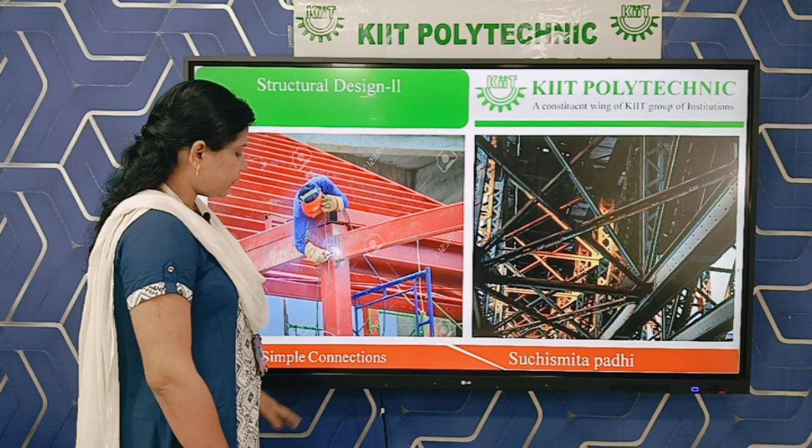Today we will read about simple connections from structural design 2. We are studying about different types of steel structure, or the design of steel structure, in structural design 2. Examples of steel structures include roofs of railway stations, auditoriums, toll gates, etc.

A simple example which we use in day-to-day life is the grill of a window. That is one example of steel structure. We make steel structures by connecting more than one member of different shapes and sizes. Generally, we use rolled sections for making steel structures, like I section, T section, channel section, and angle section. There are many other sections used for steel structures.

So these are some images of steel structures. Here, see in this image, the man is holding it, and this is another image.

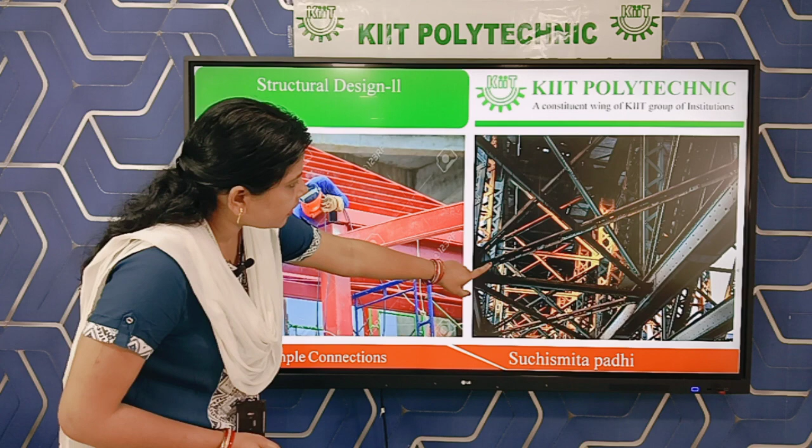So let's start simple connections. What are the types of simple connection, and what are the methods by which we connect the members in case of steel structure? Let us start with the first slide.

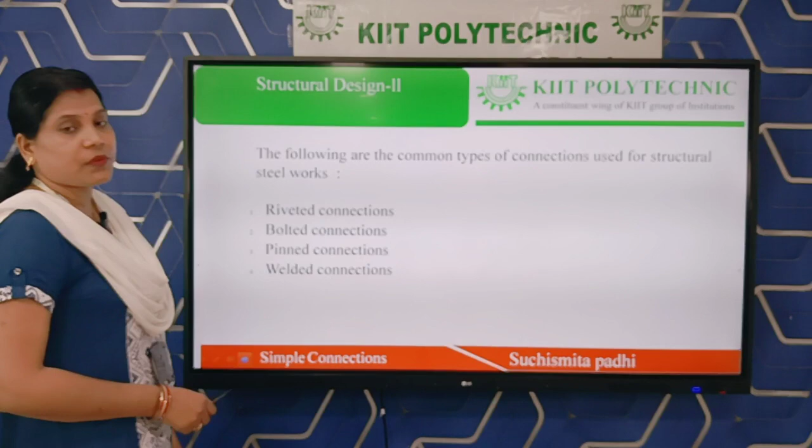The following are the common types of connections used for steel works. There are four types of connections: one is riveted connection, another is bolted connection, third is pinned connection, and fourth is welded connection.

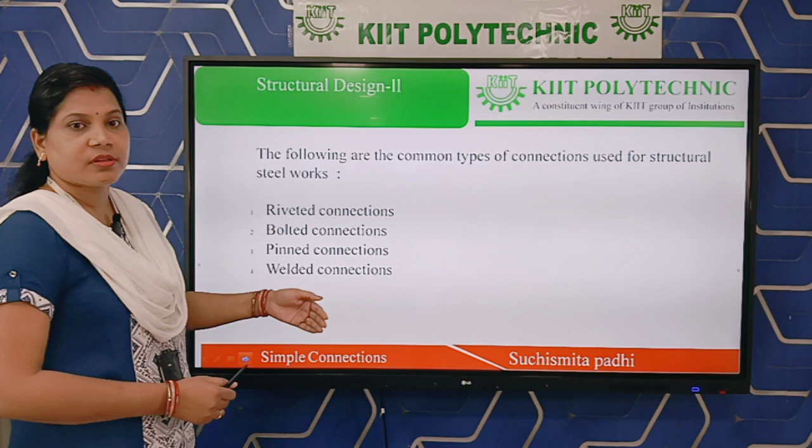Today we will cover riveted connection: what is a rivet, what is riveting, and what are the types of rivets we use, according to the shape of the head and according to the place used. So let's start riveted connection.

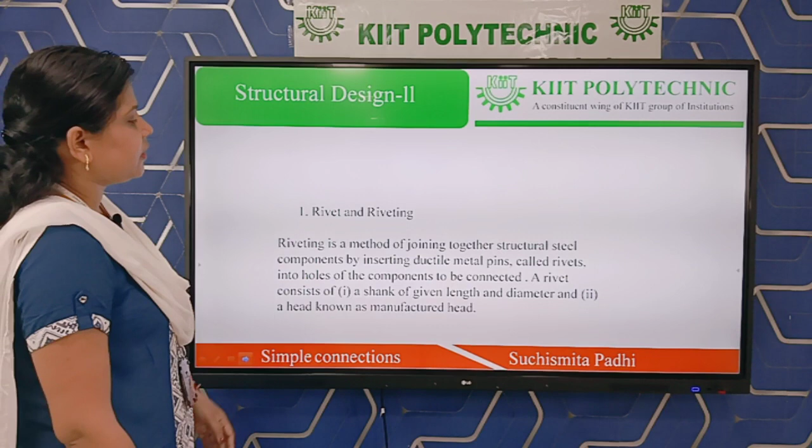Riveting is a method of joining together structural steel components by inserting ductile metal pins called rivets into the holes of the components to be connected.

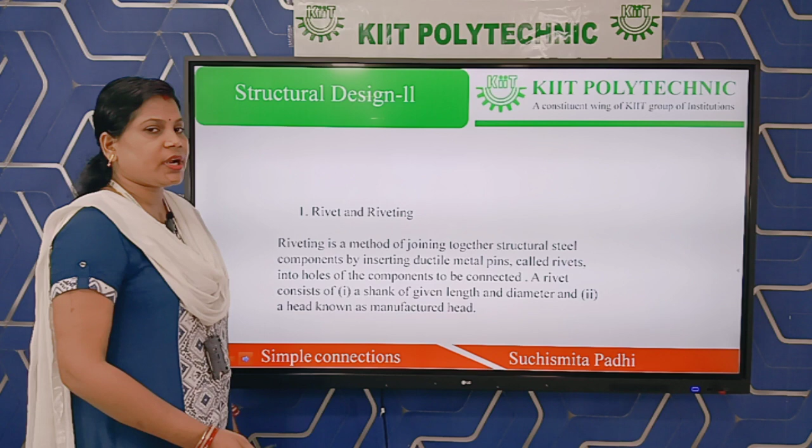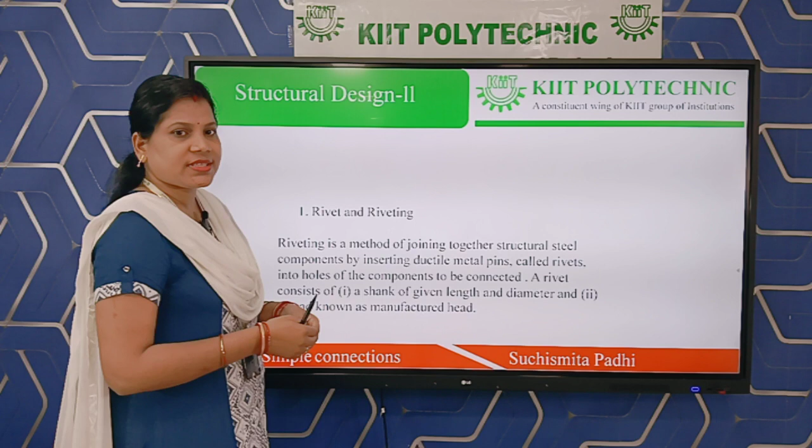In a rivet there are two parts, one is shank, another is head. The body part is known as shank, and the uppermost part is known as head. So a rivet has a shank of given length and diameter, and a head known as manufactured head.

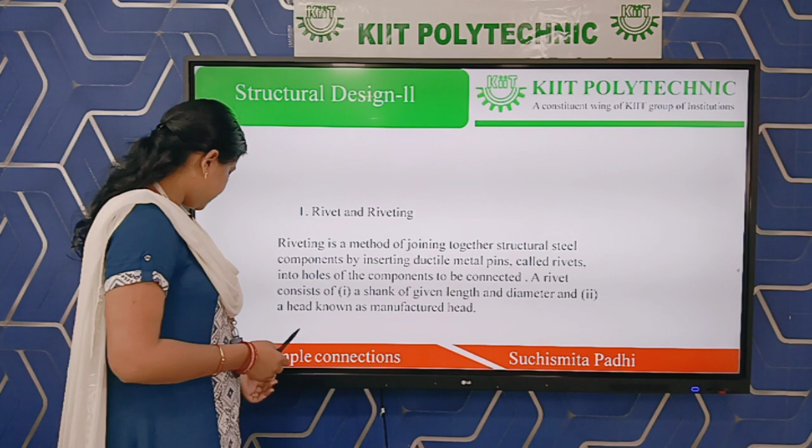So in riveted connection, according to the place used, there are three types of rivets: one is hot driven field rivet, another is hot driven shop rivet, and another is cold driven rivet - that is, hot driven field rivet, hot driven shop rivet, and cold driven rivet. So hot driven and cold driven - what is the difference?

Hot driven means before insertion of the rivet, we are heating the rivet - that is known as hot driven rivet. If you are inserting the rivet at room temperature, that is known as cold driven rivet. That is the only difference between hot driven rivet and cold driven rivet. Next is field rivet and shop rivet. Field rivet means we are using the rivet in the field, that's why it is named field rivet. And if you are using the rivet within the fabrication shop, then it is known as shop rivet.

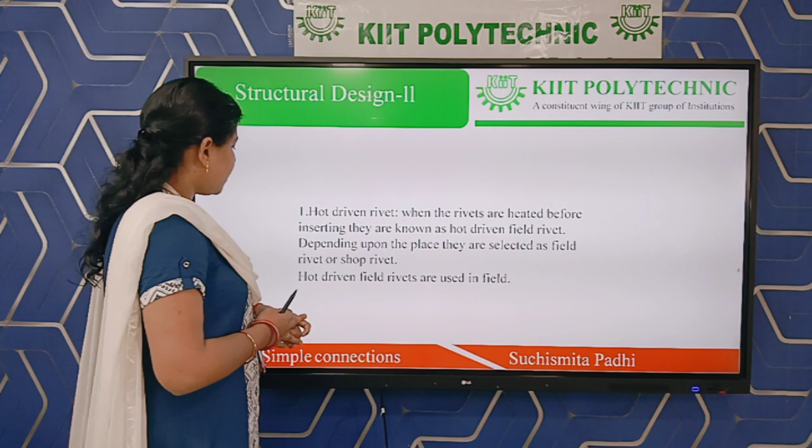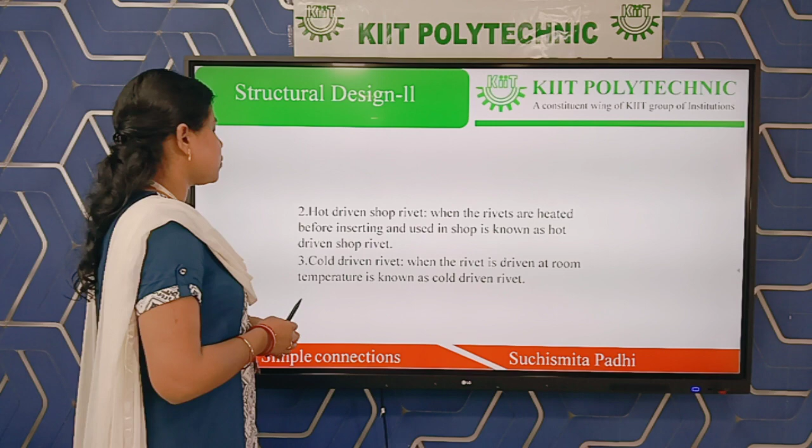So let us see the definitions. Hot driven rivet: when the rivets are heated before inserting, and depending upon the place they are selected as field rivet or shop rivet. Hot driven field rivets are used in the field. Hot driven shop rivets are used in the shop - when the rivets are heated before inserting and used in shop, it is known as hot driven shop rivet.

And the last one is cold driven rivet: when the rivet is driven at room temperature, it is known as cold driven rivet. So there are three types of rivets: hot driven shop rivet, hot driven field rivet, and cold driven rivet. The only difference is: when we heat before insertion, that is hot driven; when we use it in the field, that is field rivet; when we use it at room temperature, that is cold driven; and when we use it within the fabrication or shop, that is shop rivet.

So the next division is based on the shape of the head. There are four types of rivets according to the shape of the head: snap head rivet, pan head rivet, flat countersunk rivet, and round countersunk rivet.

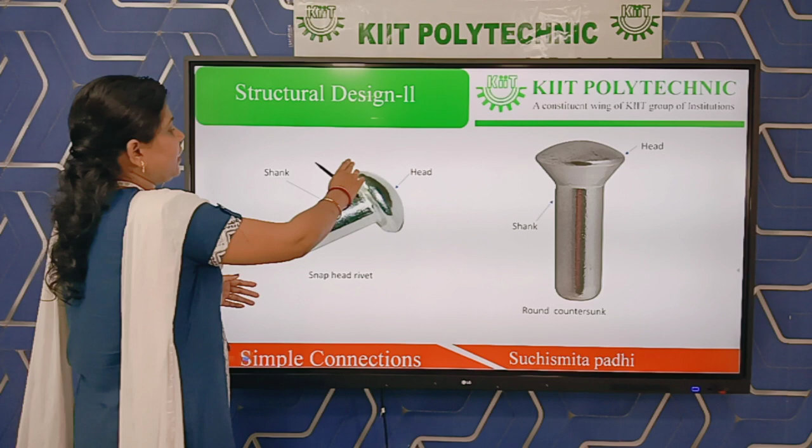First, snap head rivet. This division is only based on the shape of the head of the rivet. In this rivet, one body part is there and the upper part is named head, while the body part is named shank. The head is like a half circle, that's why it's named snap head rivet. If the shape of the head is like a half circle, then it is named snap head rivet.

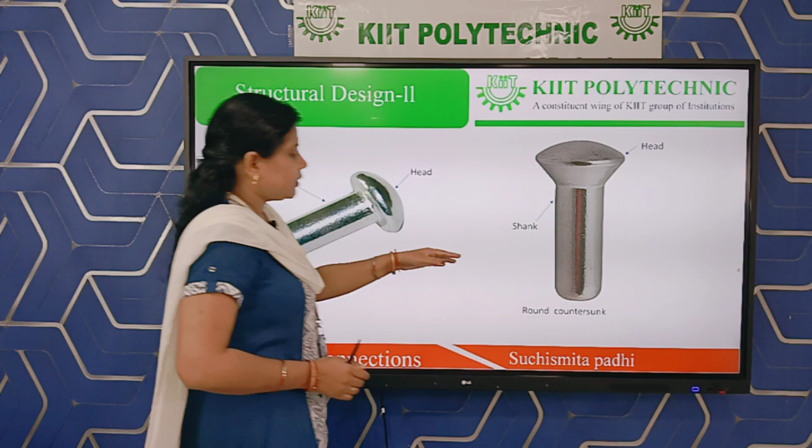Here is round countersunk, the next one. Here also one shank is there and one head is there. If the shape of the head is like this, then that is named round countersunk rivet.

Next is flat countersunk rivet. If the shape of the head is like this, then that is known as flat countersunk rivet. Here also one shank is there and one head is there.

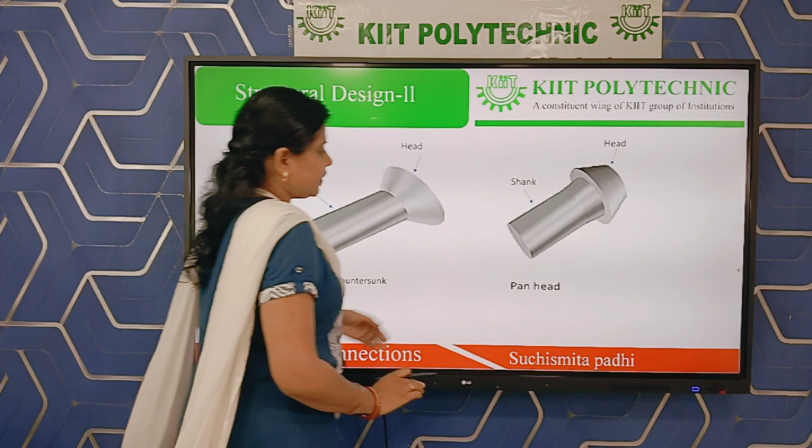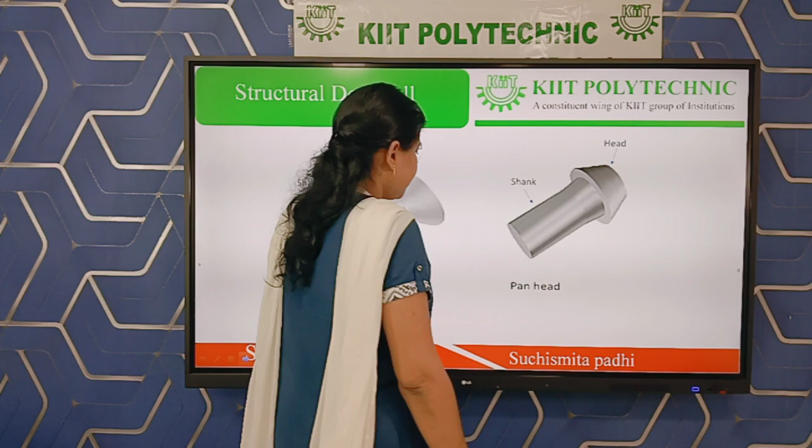Then the last one, that is pan head rivet. In case of pan head rivet, the shape of the head is like this. Here also there is one head and one shank. So according to the shape of the head, these are the various types of rivets.

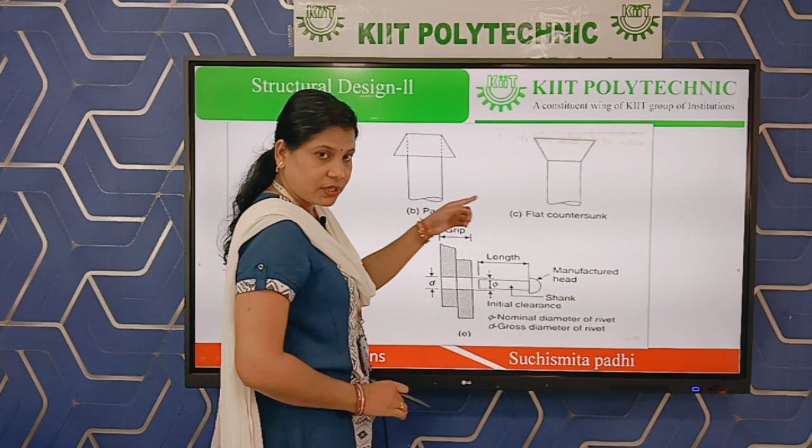See this figure, this is the figure of total rivet joint. Here two members are connected by overlapping with each other. This is one member and this is another member. By this process, two members are connected. This is one and this is another member. Two members are connected by overlapping with each other.

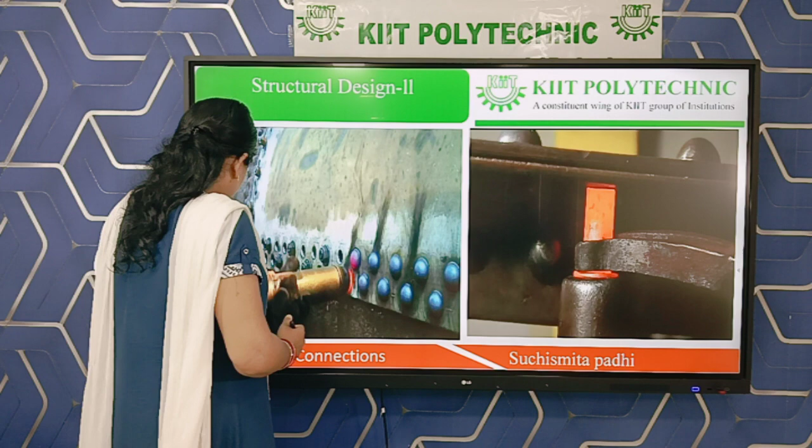This is the side view. Here, two members are connected by overlapping with each other. Then in the overlapping portion, first we have to make a hole, and the hole diameter must be small d, that is the gross diameter of the rivet.

Next, you have to insert a rivet. It may be flat countersunk, pan, snap, or round countersunk. You have to insert a rivet within that hole, and the rivet diameter must be less than the gross diameter. The rivet diameter is named nominal diameter or phi, and the hole diameter is named small d or gross diameter of rivet. So then we have to insert the rivet into the hole.

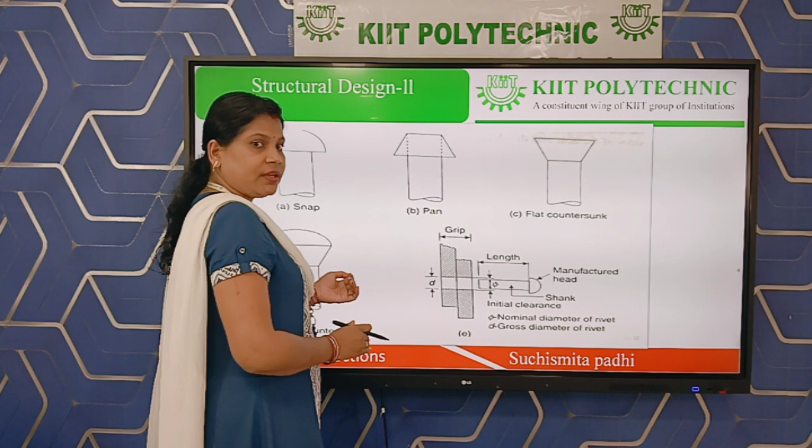Then you have to apply pressure or force at the next end to make the rivet connection fixed. Okay, then another term is there, that is grip.

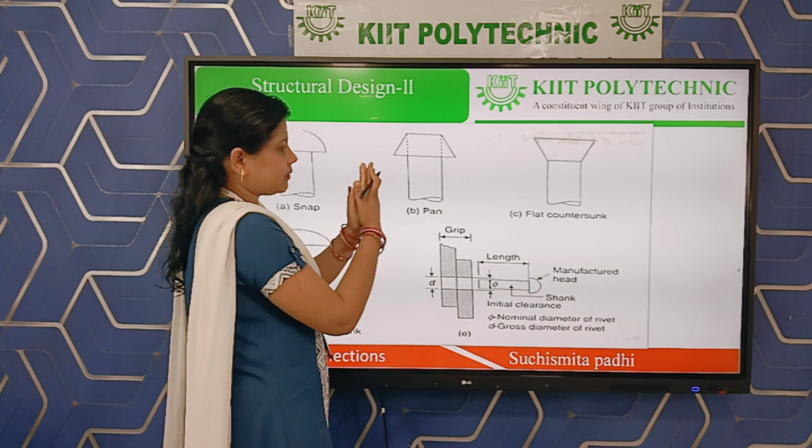Another technical term is grip. What is grip? If you are connecting two members, this is one member and this is another member. The total thickness, adding the first member thickness and the second member thickness, that total thickness is known as grip of the member.

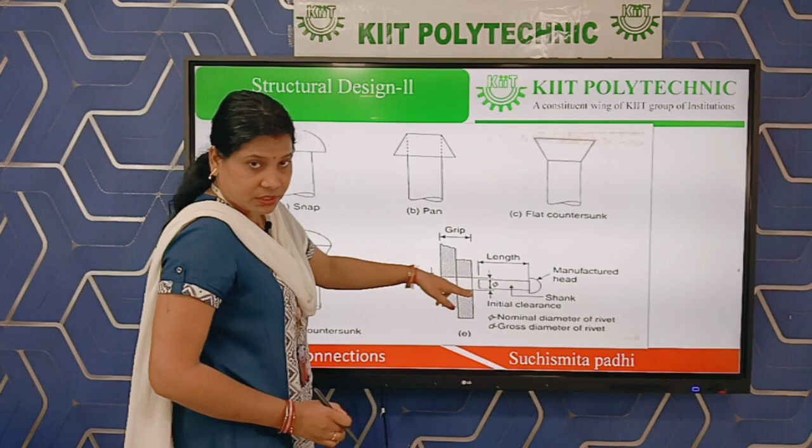There are two parts in a rivet: one is shank, another is head. So the total length of the shank is known as length. So this is the figure of rivet joint.

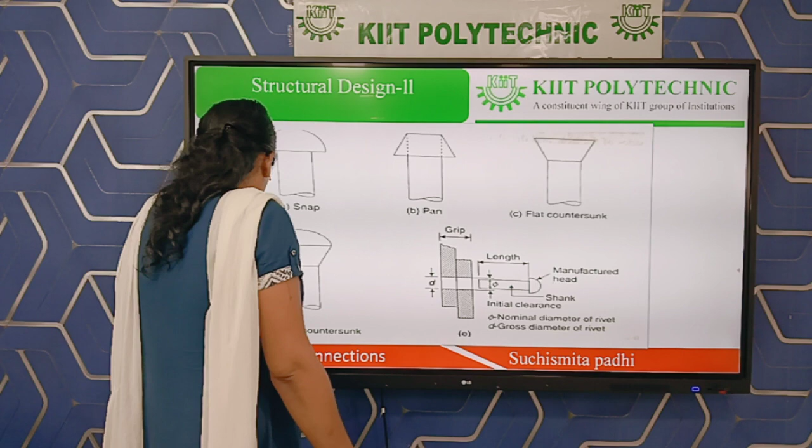So nowadays we are not using rivet joints. See, these are different steps of riveted connection.

So first step, see, here some holes are there, two members are there also. This is one member and this is another member. Some holes are there. First we have to make holes.

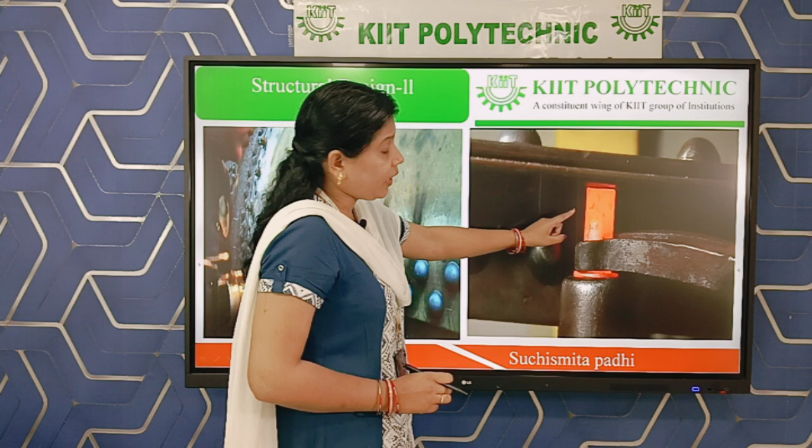Then in the second stage, we have to insert the rivet into that hole. This figure shows a hot driven rivet because it is heated before insertion, that's why the color is red.

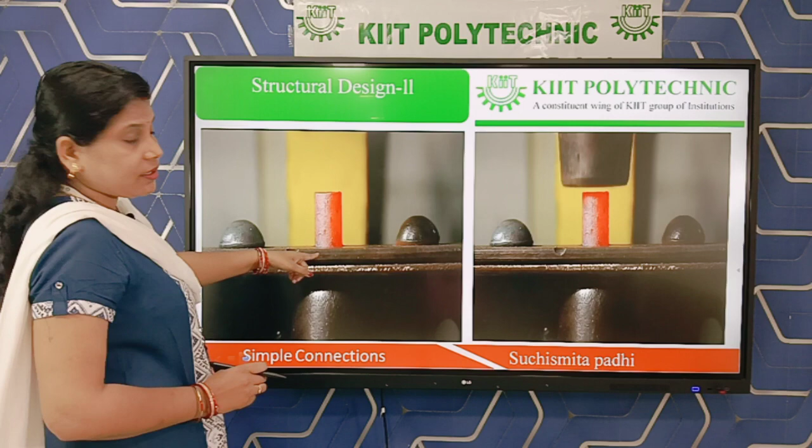So third step, here the rivet is inserted into the hole. Then after that, we are applying external force. External force can be applied by machine or manually by using hammers. Here in this figure, we are using a machine for applying external force to press the upper end.

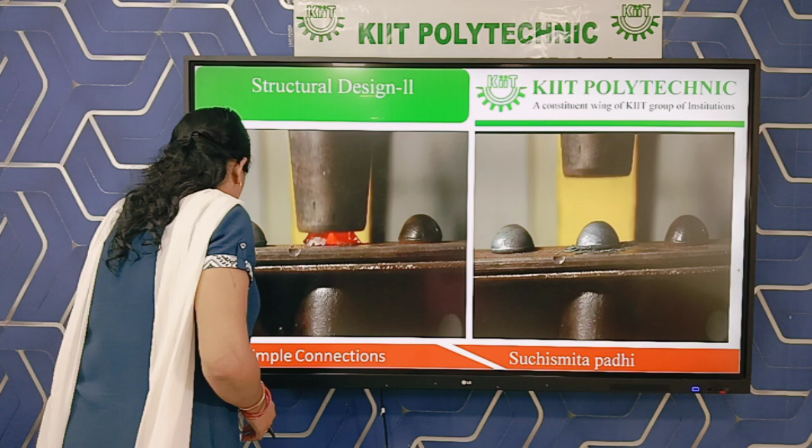See, here in this figure, the rivet is pressed, and this is the final figure of riveting. There is another figure. See, these are rivetings. So many types of rivetings are there.

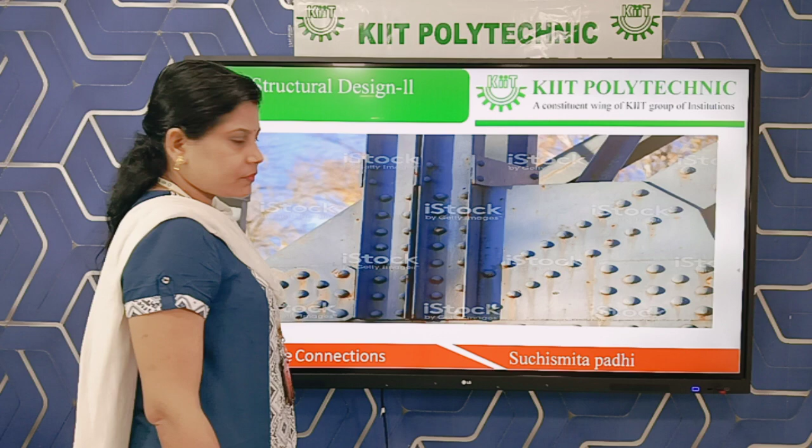By this process, riveting, we are connecting different members. There are more than one members here connected.

Nowadays we are not using riveting. There are advantages of riveting - it is a rigid connection and it also gives more strength. But there are so many disadvantages, that's why we are not using riveting. What are the disadvantages? Let us discuss.

First, nowadays riveting is no longer used in engineering structures because of the labor cost associated with large riveting crews. In case of riveting, large riveting crews are used, and also there is so much labor cost. That's why we are avoiding riveted connections.

Second is high noise pollution. During the riveting process, whether manual or by using machine, there is high noise pollution. That's why we are not using riveting.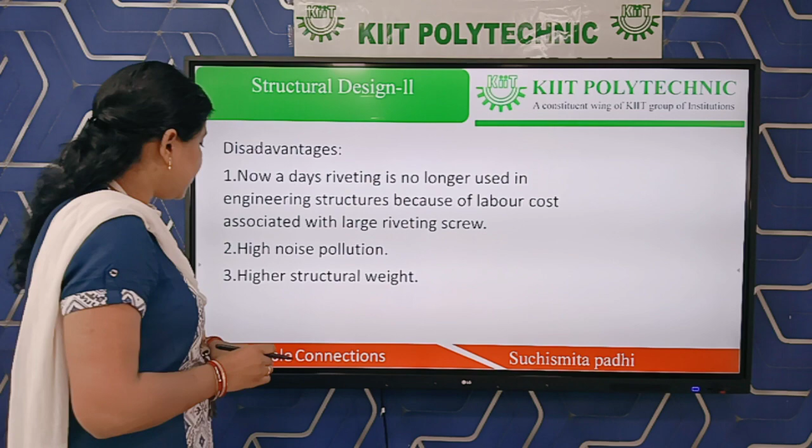And high structural weight - if you are making a structure by using the riveting process, then the structure becomes heavy weight. That's why also we are not using riveting nowadays.

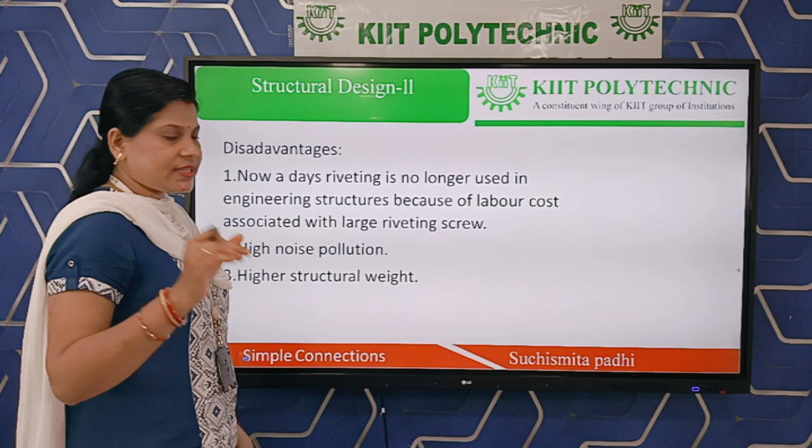These are the drawbacks. And in simple connections, there are so many technical terms we have to cover before designing. Let us start with the technical terms. The following definitions are used for riveted or bolted connections - these are the technical terms which we will cover during designing.

First is the shank of the rivet before riveting, which is called the nominal diameter - we have already discussed this in the third or fourth slide. So the nominal diameter is the diameter of the shank or diameter of the body.

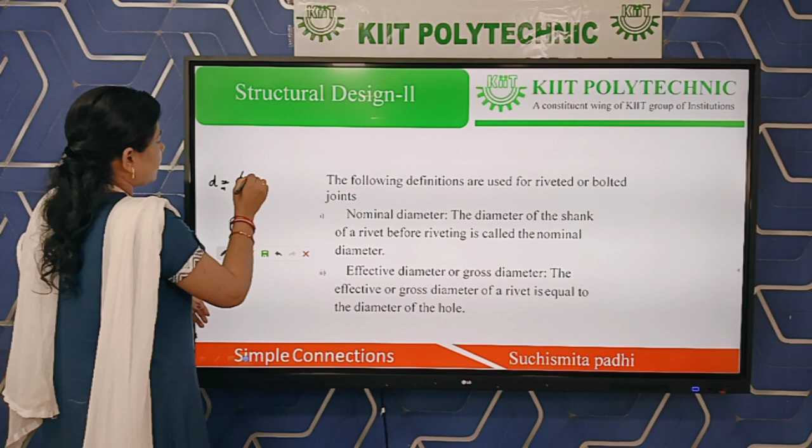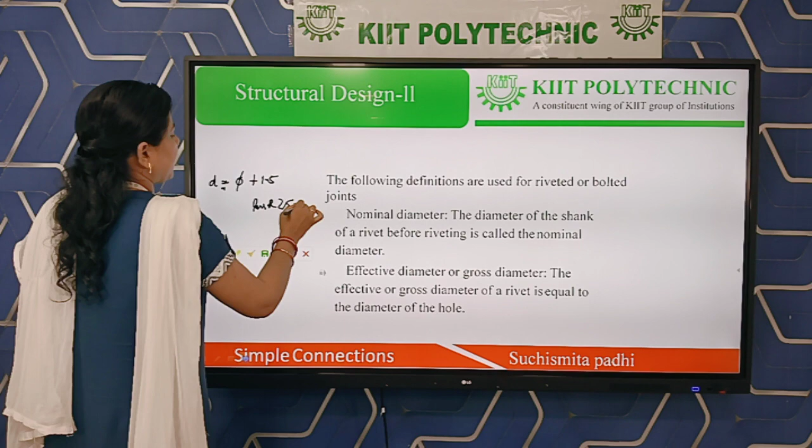So, small d equals phi plus 1.5 when the diameter of the rivet is less than 25 millimeters. So there is a formula to calculate gross diameter: gross diameter equals nominal diameter plus 1.5 when the diameter of the rivet is less than 25 millimeter, and gross diameter equals nominal diameter plus 2.5 when the diameter is greater than 25 millimeter.

This is the first step of design, and this procedure we have to follow in every question. In every design question, we have to follow this step. This is the first step.

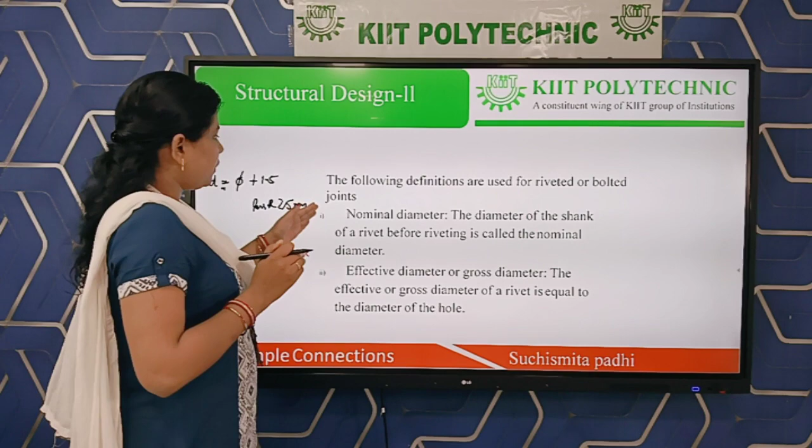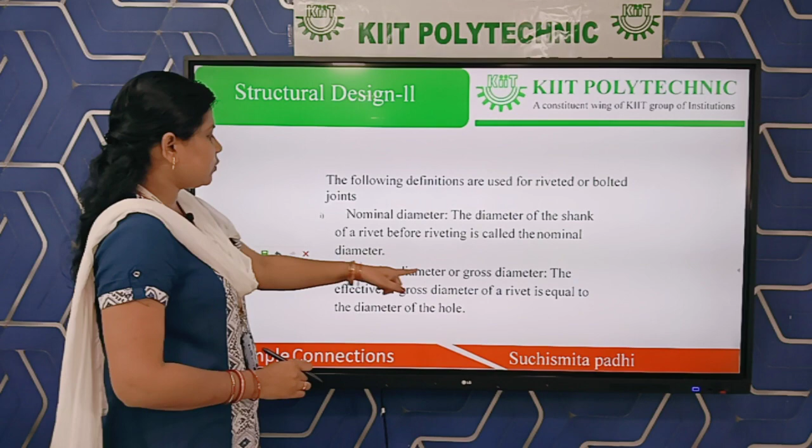This formula we have derived from the code, that is IS 800-2007, which is used for design of steel structures. The formula is: gross diameter equals nominal diameter plus 1.5 when the diameter of the rivet is less than 25 millimeter, and gross diameter equals nominal diameter plus 2.5 when the diameter of the rivet is greater than 25 millimeter. So you have to remember these two formulas for calculation in step 1.

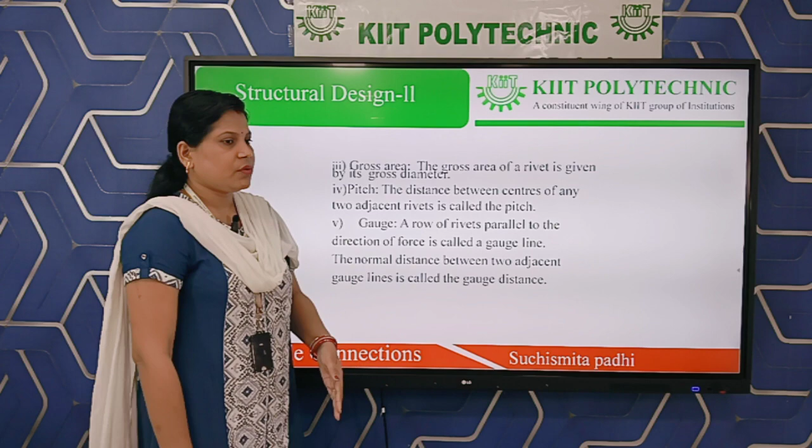Next technical term is gross area. When we are calculating the area by using the gross diameter, that is known as gross area. Similarly, when you are using the nominal diameter for calculating area, that is known as nominal area.

Next is pitch, which is very important. Pitch - the distance between the centers of any two adjacent rivets - is called the pitch. This is a very important definition.

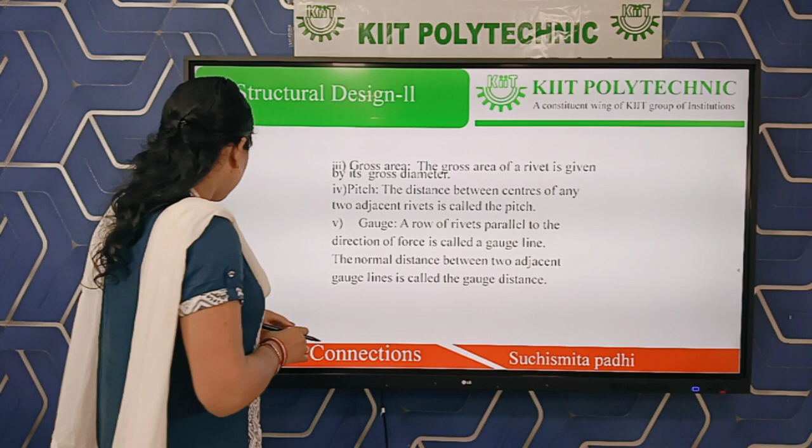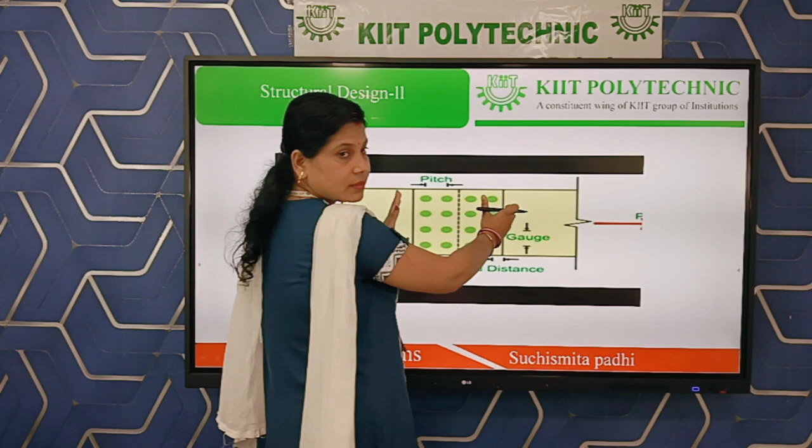Let us see an image so that we will understand clearly what is pitch. See this image: here one dotted line is at the mid portion and two solid lines are there, and two forces are acting at the two ends - one force at the left side and another force at the right side. At the mid portion there is a solid line, and pitch, edge distance, end distance, gauge - different technical terms are there.

So there are four types of connection, but within the connection there are different types of joints. Like rivet connection is divided into two types of joints. What are the different types of joints? First is lap joint, another one is butt joint.

What is a lap joint? If you are connecting members by overlapping with each other, then that is known as a lap joint. Two members to be connected - this is one member and this is another member. If the two members overlap with each other, some portion is overlapped, so that is named a lap joint.

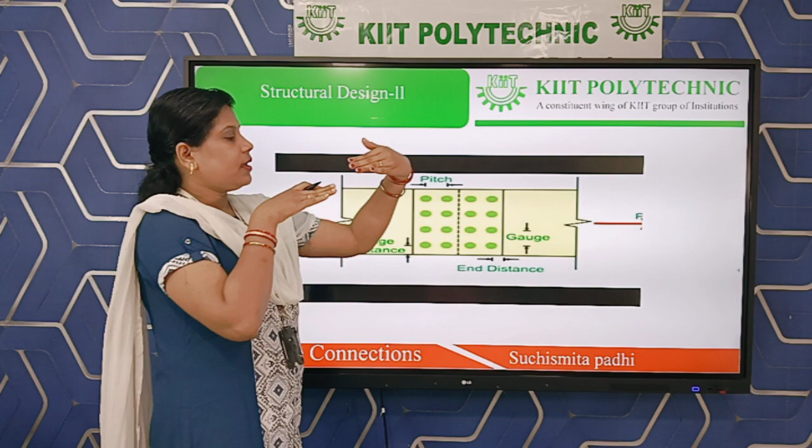Butt joint means two members to be connected end to end. This is one member and this is another member.

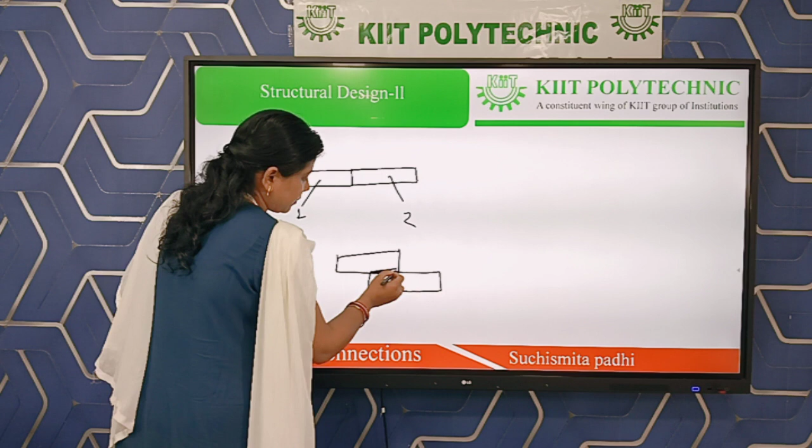So this is another member. This is the first member and this is the second member - number 1 and number 2. Here two members are connected end to end. But in case of overlapping or lap joint, two members must be overlapped with each other. This is the first member, this is the second member, here some overlapping portion is there, that's why it is named a lap joint.

In case of a butt joint, the members are connected end to end. Then we are providing one cover plate or two cover plates according to the requirement. The first step is to connect the members end to end, then we can provide one cover plate or two cover plates.

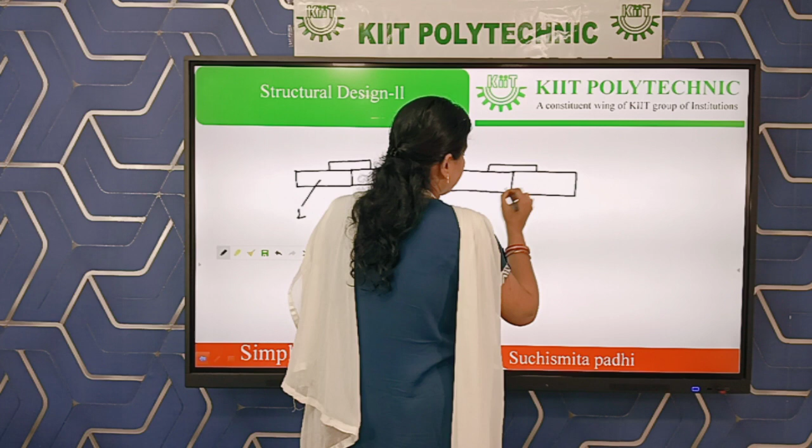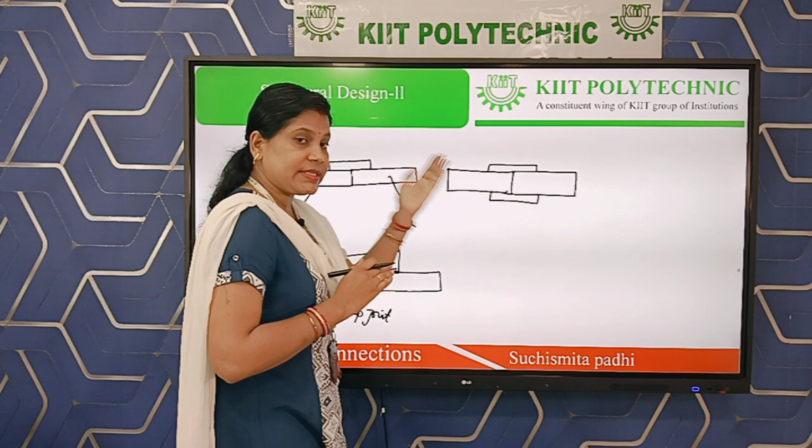The butt joint is divided into four types: single cover, double cover, single bolt, double bolt. If you are providing one bolt on one side, then this is named single bolted single cover. Here one bolt on one side - this is the connection point, the end to end connection point. Then on one side we provide one bolt, on another side we provide another bolt. That's why this is single bolted with single cover. Here is single bolted with double cover.

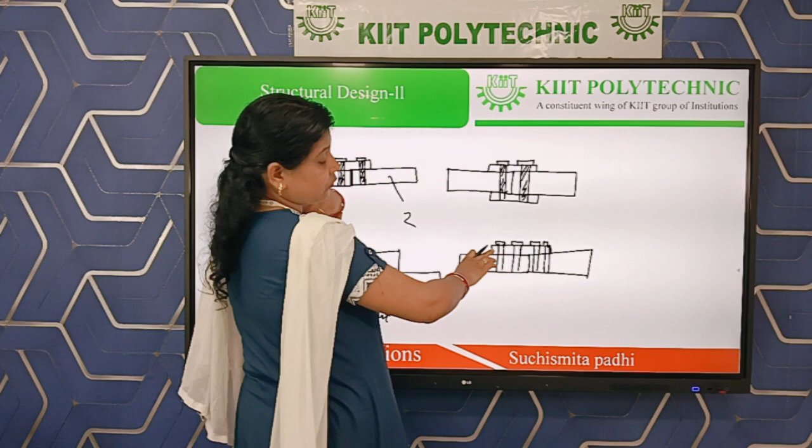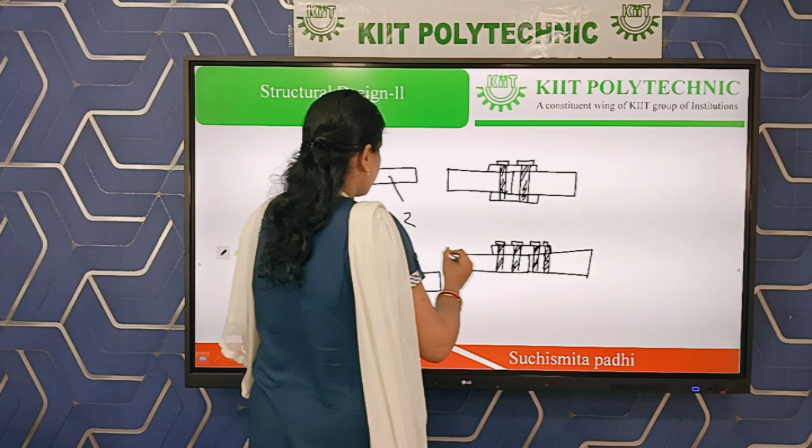Another two butt joints are there. This is single cover with double bolted, because on one side we are providing two bolts. That's why single cover, double bolted. And the last one is double cover, double bolted. This is single cover single bolted, double cover single bolted. The third one, number 1, 2, is single cover double bolted. The next one is double cover double bolted.

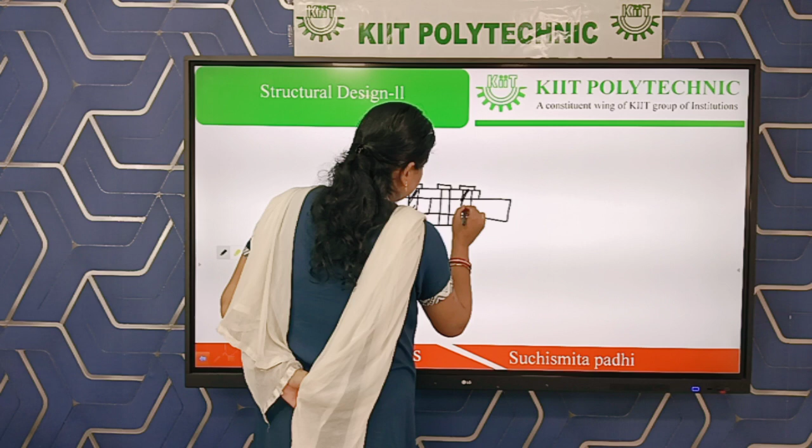This is the last one: end-to-end connection, double cover. We have to provide two covers, one cover at the upper end and another cover at the lower end, then double bolted. This is number 4, double cover with double bolts. Double bolts means on one side we are providing two number of bolts. That's why that is named double cover, double bolted butt joint.

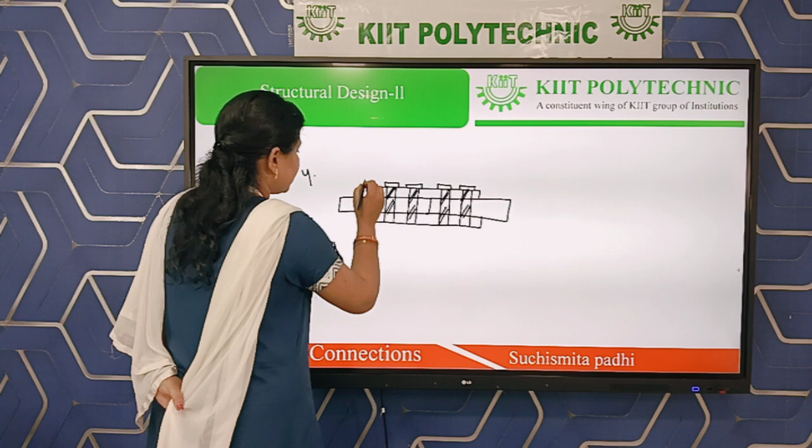So this is the side view and the top view. Here, this is the top view I am drawing. The two corners we can see from the top - this is one, this is another one. So this connection point, the end to end connection point, we can see from the top.

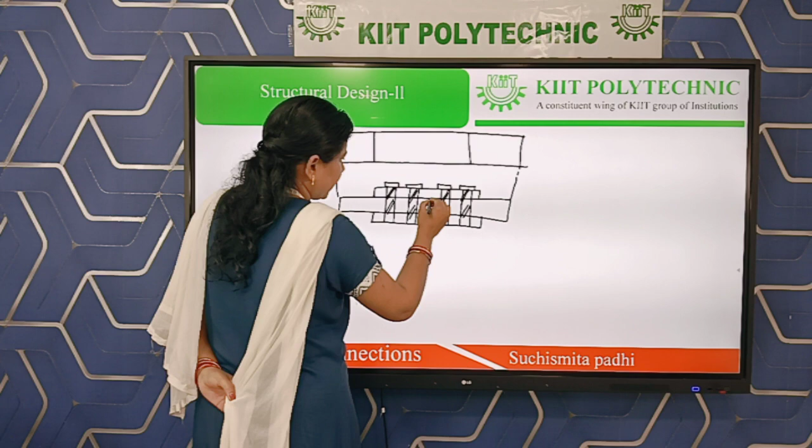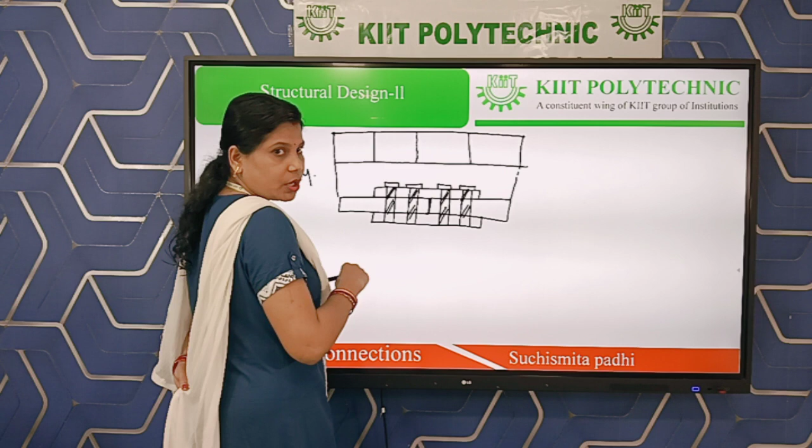That's why that is a dotted line in the figure, and it is a solid line because this is the cover plate, the upper cover plate. You can see the corner points of the cover plate from the top. Okay, this is the bolt.

You can provide any number of bolts according to the design. So the center line is dotted and the outer line is solid, because from the top we can see the outer line, not the center line of the end-to-end connection, and here two tensile forces are acting, one at the left end and another at the right end, because we are applying force at the center.

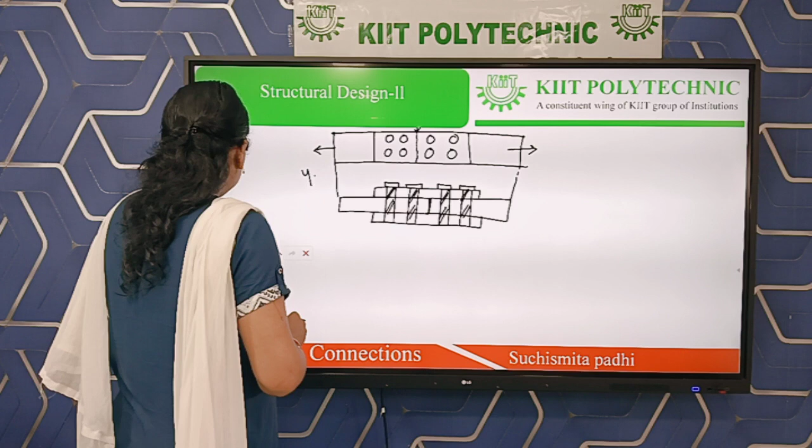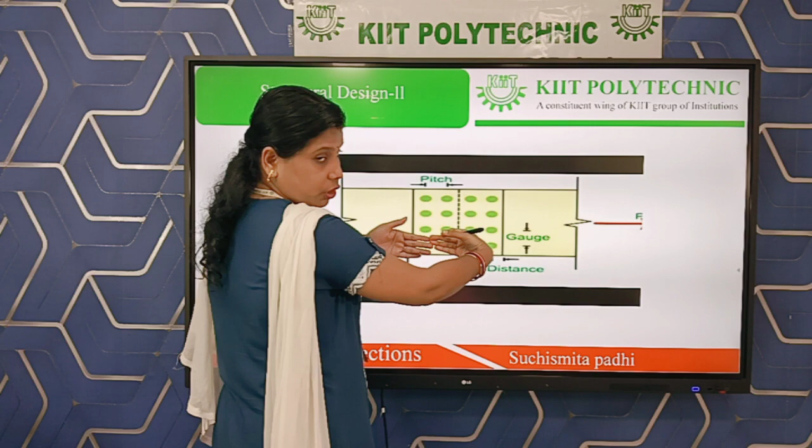See the figure. This is a dotted line, the end-to-end connection which you can see from the top, because this is the top view, and here these are the solid lines, the lines of the corners of the cover plate, and two forces P, one at the left and another at the right.

Pitch is the distance between two consecutive bolt holes, measured parallel to the direction of stress, or measured horizontally. We are measuring pitch horizontally - this is the distance between two consecutive bolt holes.

The distance between two consecutive bolt holes measured parallel to the direction of stress. We are measuring the pitch horizontally.

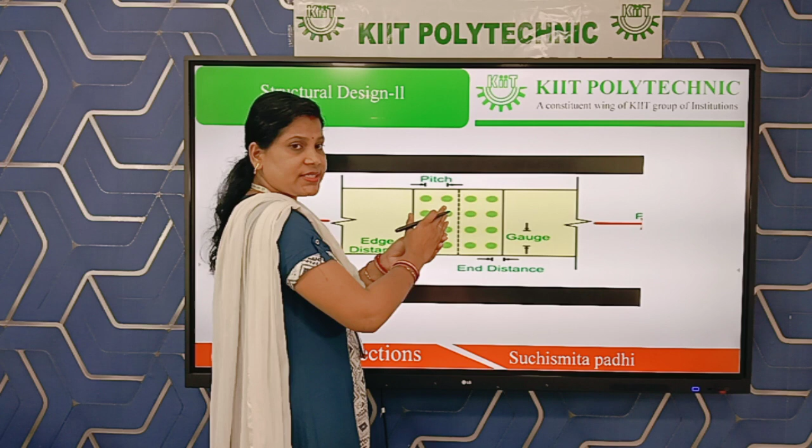Just opposite of pitch is gauge. If you are measuring the pitch horizontally, then we are measuring the gauge vertically. The definition is the same: we are measuring the distance between two consecutive bolt holes that is perpendicular to the direction of stress. If this is the direction of stress, then we are measuring perpendicularly or vertically. That's why gauge is just opposite of pitch.

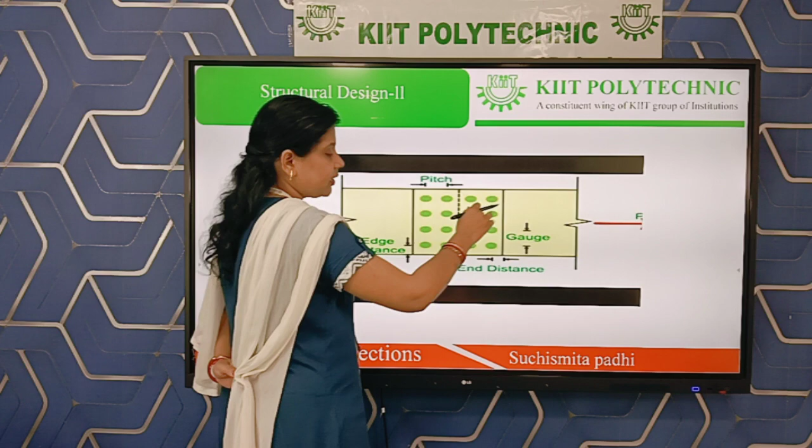In case of pitch, we are measuring the distance horizontally, or parallel to the direction of stress, and in case of gauge we are measuring the distance vertically, that is perpendicular to the direction of stress.

Now let us come to end distance and edge distance. End distance is just opposite of edge distance and edge distance is just opposite of end distance. What is end distance? It is the distance from the center of a bolt hole to the adjacent edge measured parallel to the direction of stress, meaning we measure it horizontally.

Just opposite of end distance is edge distance, meaning the distance from the center of a bolt hole to the adjacent edge measured perpendicular to the direction of stress. This is the direction of stress, and we are measuring perpendicularly or vertically from the center of a bolt hole to the adjacent edge, and that is named edge distance.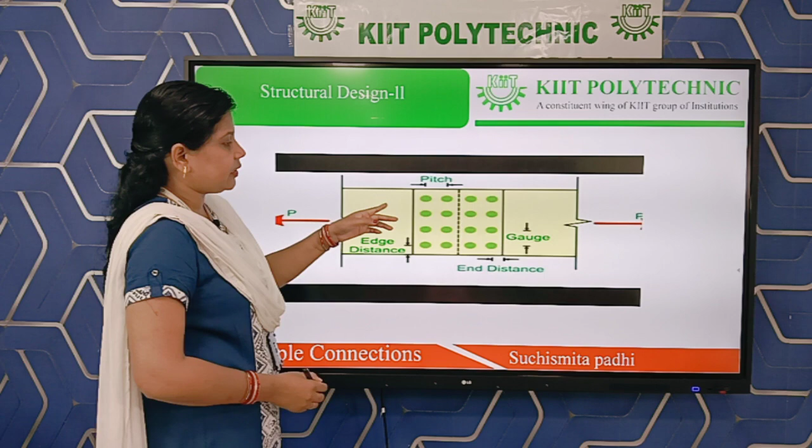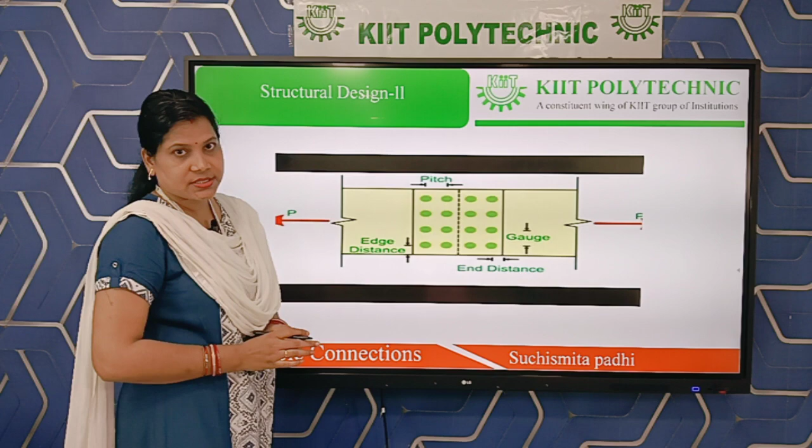So these are four important technical terms which we will use later during the calculation or design of a problem: pitch, gauge, end distance and edge distance. Pitch is the opposite of gauge, and end distance is the opposite of edge distance. We are measuring two distances, one parallel to the direction of stress, another perpendicular to the direction of stress.

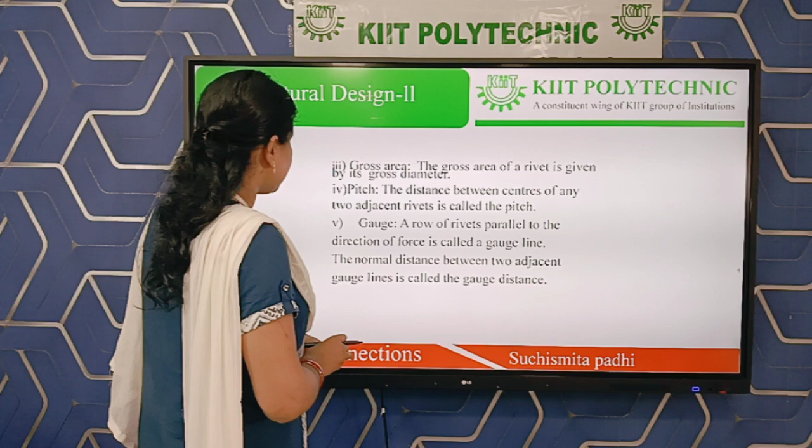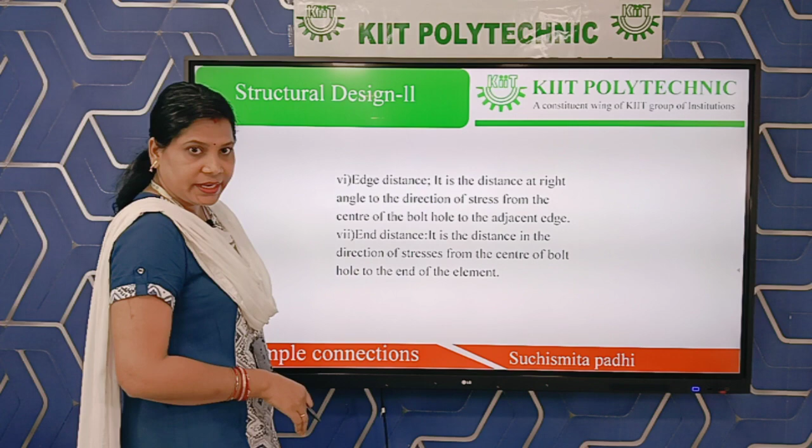Let us read the definitions. Pitch and gauge: a row of rivets parallel to the direction of force is called a gauge line, and the normal distance between two adjacent gauge lines is called gauge distance. Edge distance is the distance at right angle to the direction of stress from the center of the bolt hole to the adjacent edge. End distance is the distance in the direction of stress from the center of bolt hole to the end of the element.

Just opposite of edge distance. Next is staggered pitch. So normal pitch and staggered pitch, what is the difference?

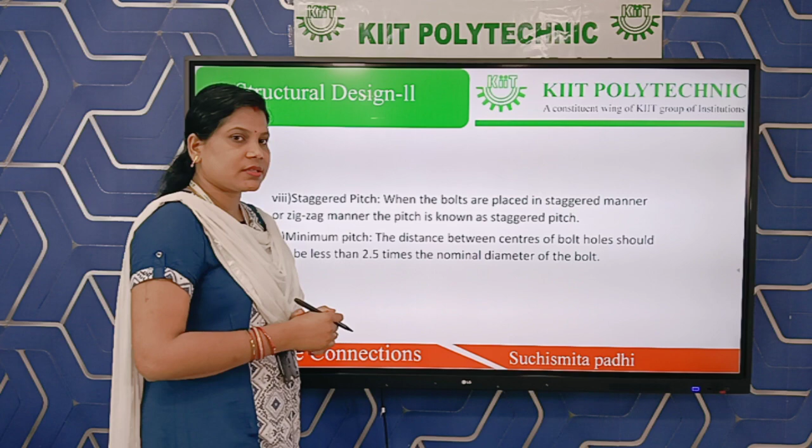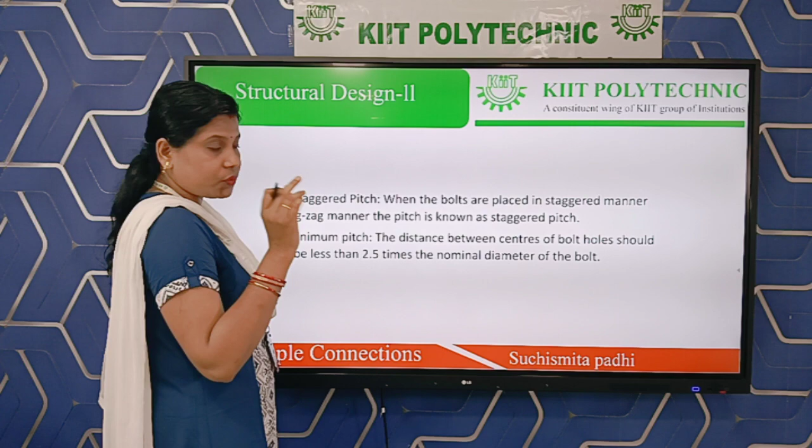The definition is the same. We are measuring the horizontal distance between two adjacent bolt holes, parallel to the direction of stress. But in case of normal pitch, the arrangement of the bolt holes or bolts is in chain manner, meaning in column manner or row manner. In case of zigzag pitch, the bolt holes or bolts are arranged in zigzag or staggered manner. That's why the pitch in between is named staggered pitch.

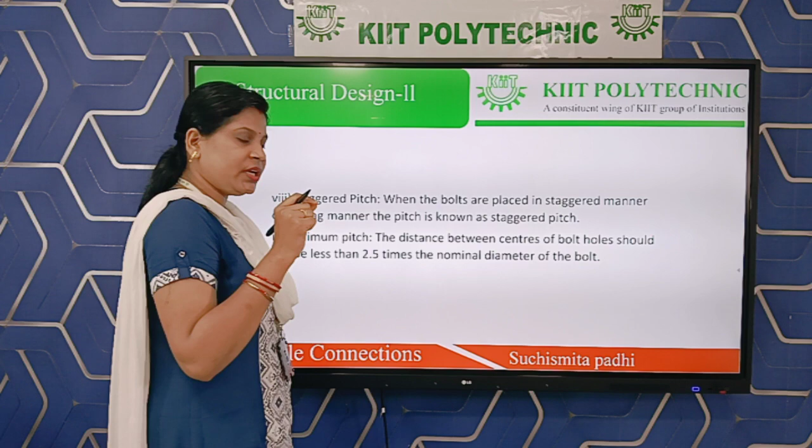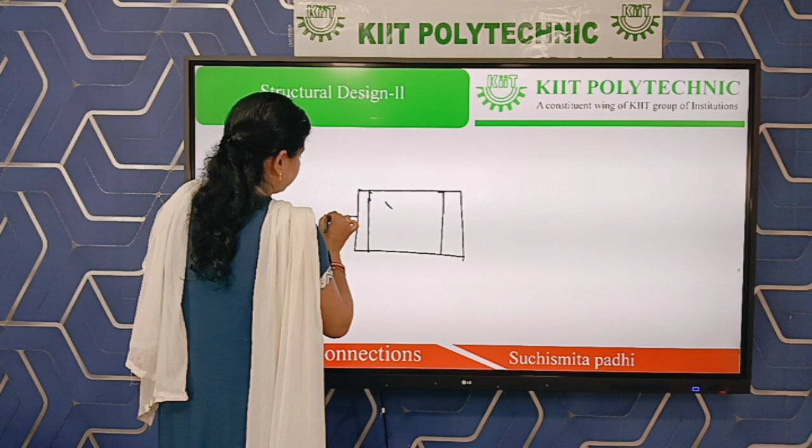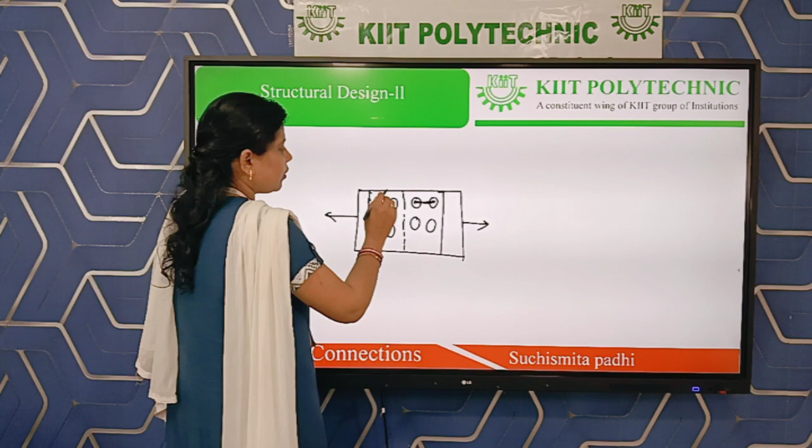So let's draw a figure for staggered pitch. In case of normal pitch, two forces are acting, and the arrangement is like this, in column manner or row manner. So we are measuring the pitch horizontally: it is the distance between two adjacent bolt holes measured parallel to the direction of stress or horizontally. This is in chain manner, or horizontal manner, or row manner, or column manner.

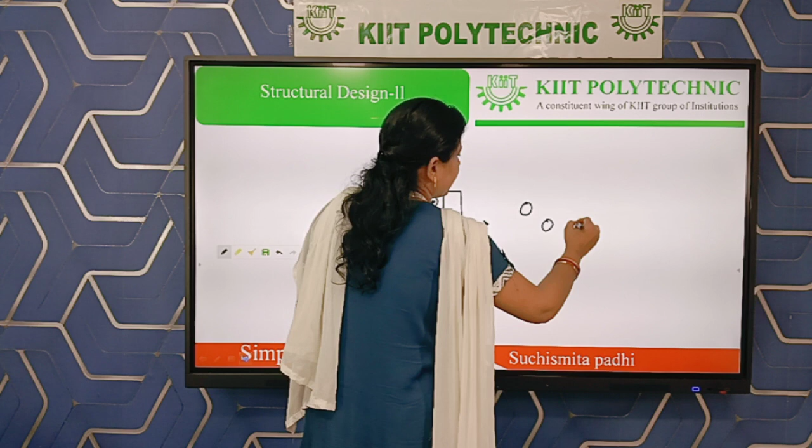But in case of staggered pitch, the bolts are arranged in zigzag manner. That's why we are measuring the pitch inclinedly, and it is named staggered pitch.

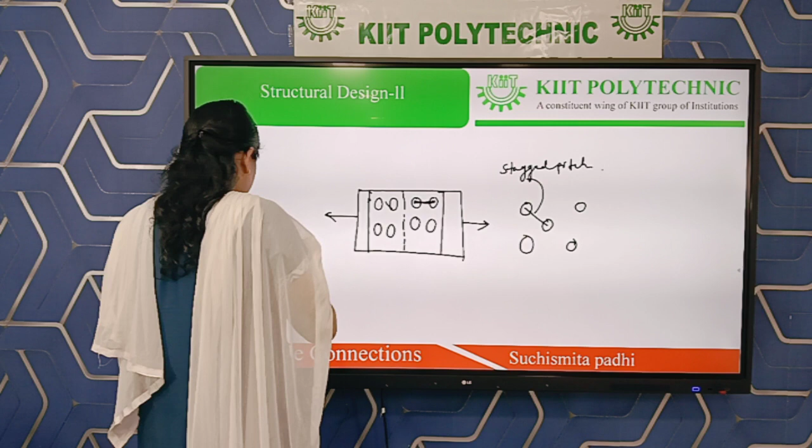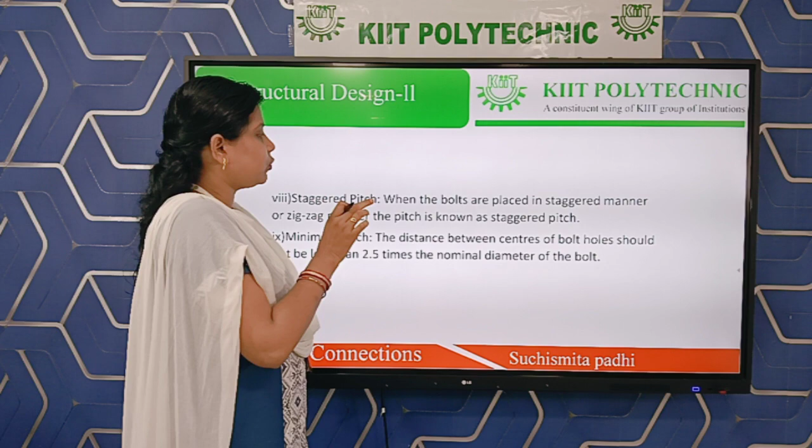When the bolt arrangement is in chain manner, it is called normal pitch, and when the bolt arrangement is in staggered or zigzag manner, it is called staggered pitch. Always we are measuring the distance between two adjacent bolt holes, parallel to the direction of stress, or horizontally. Next is minimum pitch.

The distance between centers of bolt holes should not be less than 2.5 times the nominal diameter of the bolt. So this is the minimum pitch, which should not be less than 2.5 times the nominal diameter, which we will use during the design of a problem.

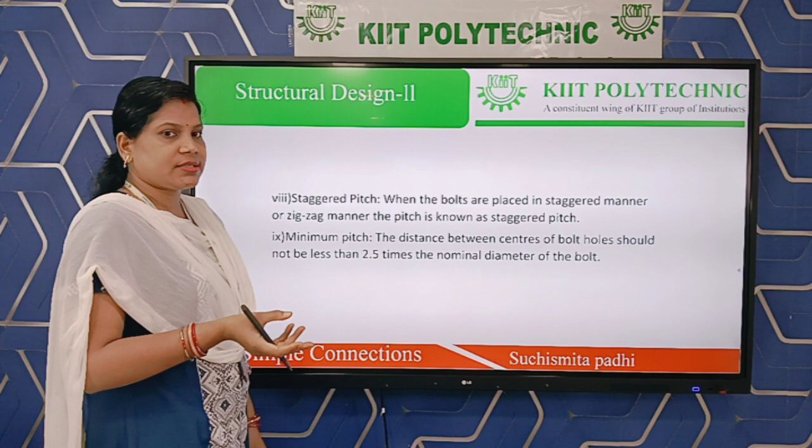So these are the different technical terms for simple connection, and in the next slide we will read about the other connections, that is pin connection, welded connection and bolted connection. So thank you for today.